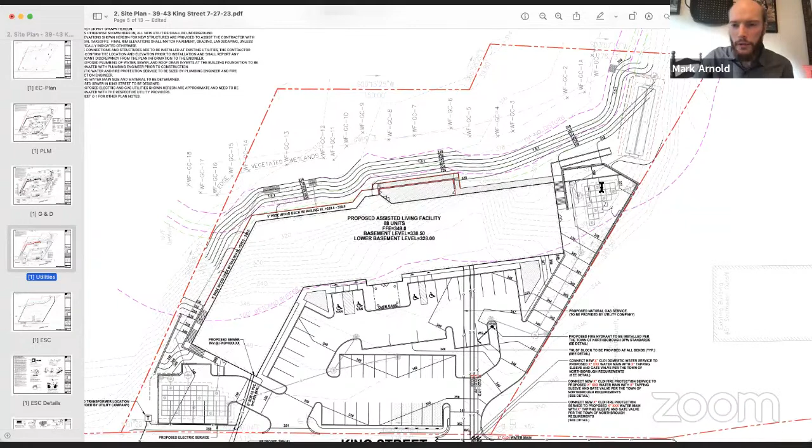Existing buildings are to be demolished. Parking lots up front, a stormwater system to the southwest in the corner to the bottom left, another system to the northeast in the upper right corner, and then another system as well also in that upper right corner.

There are also several different points of stormwater discharge behind the building that have riprap, and those are from overflows from the systems and also from the roof drainage itself.

There's a boardwalk and walkway behind the building with associated patio space that is called out as a paver system, but it's mapped as impervious surface under the stormwater management design.

The purpose of this application is the stormwater bylaw, which was implemented by the town of Northborough after this project received an order of conditions. So we filed a land disturbance permit for disturbing more than 1 acre of land.

As part of this application, this project is subject to the NPDES permit and SWPPP, which is noted on the site plans on the erosion control sheet. That, under the regulations, is considered equivalent to the erosion sedimentation control plan described in section 8 of the regulations. So our applicant is intending to prepare a SWPPP.

It includes all the requirements necessary in your regulations. That SWPPP is usually prepared prior to construction to allow the site contractor to provide additional insight and also to ensure that they are fully up to speed on the regulations of your bylaw and the permits.

We do expect several conditions from this commission. There were several comments by Vincent that we understood could be conditioned. One included noting that the construction edge would be more than 50 feet. The other would be ensuring that the O&M was updated to notify that the commission would be submitted annual reports.

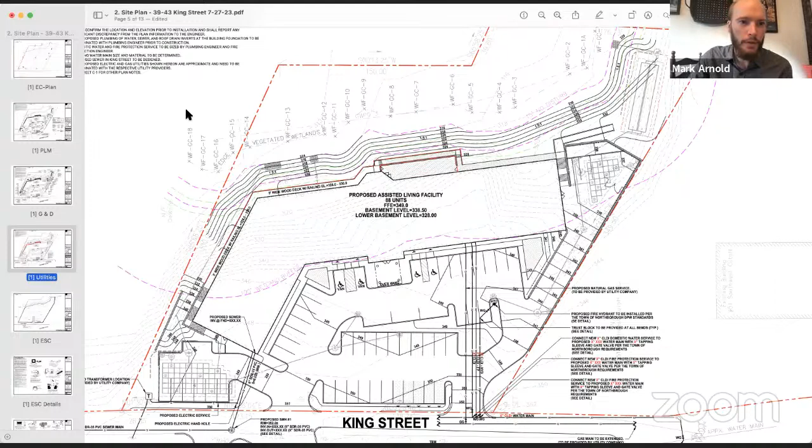There are several others. I don't know if Vincent wants to run through his highlights or I can run through the rest of his comments, but in a gist, that's really where we are. Again, the project is basically the same as it was when this commission approved an order of conditions.

We've added additional stormwater management. The limit of work has virtually not changed. We've actually reduced some grading in some spots, but otherwise it's virtually the same as what was seen under the order of conditions besides those tweaks. Great, thank you, Mark. Vinny, have you received all the information you've been looking for?

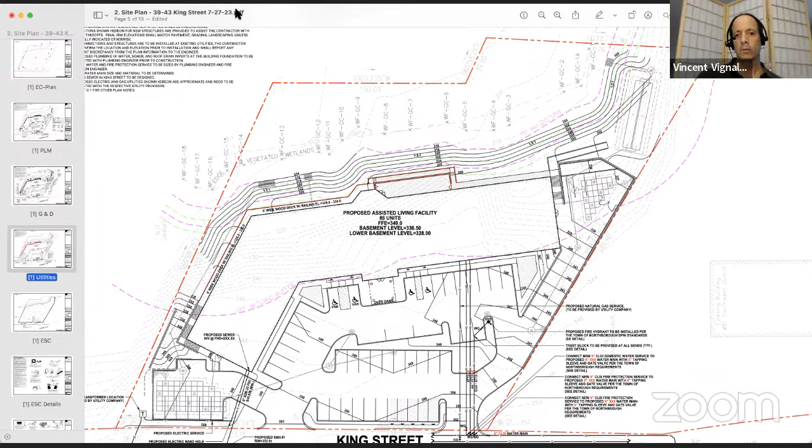Not that I requested. I think the idea here is that this did receive an order of conditions, and it was extended by the commission. But this is a new bylaw, the land disturbance bylaw, so that really reflects the need for the details that are going to occur during the construction activities.

So that is in the bylaw, that those are supposed to be submitted as part of the application for the permit. It also notes in the bylaw that the stormwater pollution prevention plan is considered part of this, and it is typically submitted 14 days prior to the start of construction. They're two separate things - one's a federal permit, the other is a local Northborough permit.

And so that's why I was looking for the information that would be typically included in a SWPPP to also be included with this at this time, so that we would have a chance to comment and make sure that everything that should be in the SWPPP is contained in that document.

And Vincent, we are glad to provide that information in that SWPPP prior to construction. And if there needs to be a condition about a certain deadline to submit that SWPPP prior to construction, you can review that, that's fine. And if the commission wants to put a condition that SWPPP must be reviewed and approved by Vincent prior to the start of work, that's also suitable, I think, to provide coverage for what the town is seeking to protect here, which is the wetland resource areas, and also prevent damage to abutters.

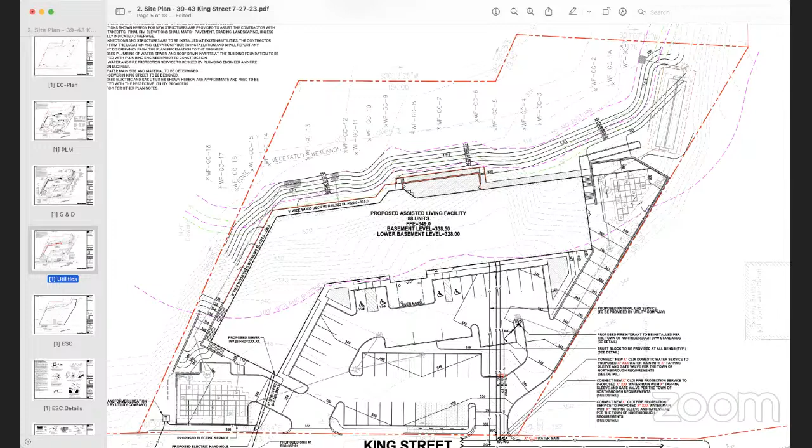Okay, great. Thank you, Rashid. Vinny, what's your thoughts here? I'll tell you mine after yours, then we can go around to the commission, see what they say.

Actually, it's pretty much what I had said. The bylaw states the idea that you're allowed to have the SWPPP submitted 14 days - it's required by federal law that it be submitted 14 days in advance of the start of construction. That's a quote from the federal regulation. The intent that I was told from Fred and in this bylaw itself is to have all that information included in this application, because, as I said, this is not a notice of intent.

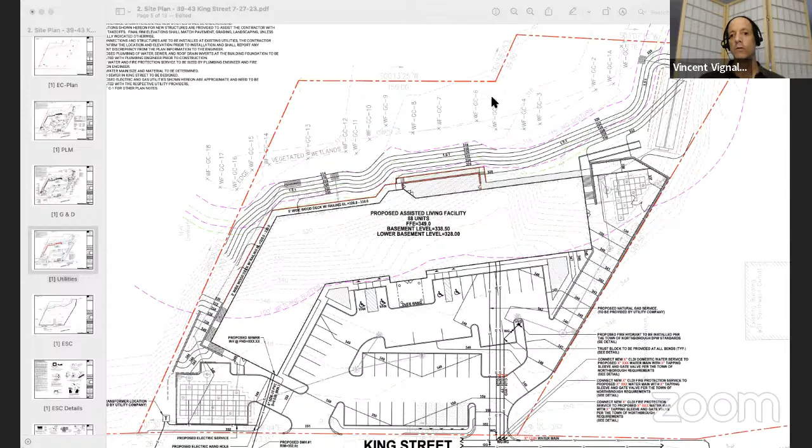One of the questions that I asked was if we could reduce the grading in the upper left corner of the plan.

The response I got was that it's already been permitted. Well, actually it hasn't, because this is a separate permit. It's been approved under the Wetlands Protection Act, but not under this, because changes occurred with this walkway around the back, and the grading associated with that makes the opportunity better for the grading in that back corner to have it as an elevated walkway, as on the right side of the building. They've also added parking and infiltration practices to meet the new revised stormwater standards. So these are things we were going to review as part of the land disturbance permit, and not require them to do an amended order of conditions. So this isn't just a simple case of approving a plan we already have a permit for. There's more to it.

My thoughts here is I'd like to see a complete application, and that includes a SWPPP, and I think we should have a SWPPP done and include that with the filing. This property, we walked it many times several years ago. It's fairly sloped, and there's an active wetland environment right in the rear, and this is going to go right down to the edge of that, as far as it can under the old regulations. This is still a new area we're in, and I really don't want to establish precedent that is loose, let's put it that way. So that's where I'm coming from.

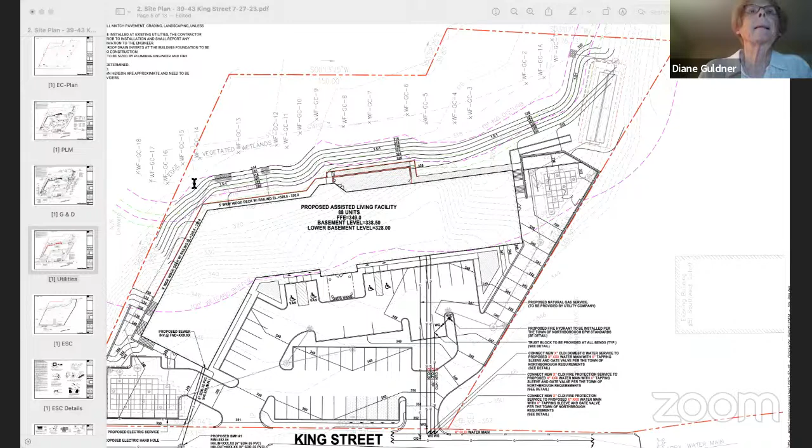No, okay. I see Rashid's hand is up. You're muted, Rashid. Yes, can you hear me, Mr. Chair? Yes, sir.

I don't know how long the SWPPP is good till, but my thought was to do the SWPPP, as it's required by law, 14 days before we're ready to start. Honestly, I have not chosen any operator on this yet, so I would rather just do what Vince is saying, provide the information, the portion of the SWPPP, whatever is needed in this application. I was already planning to do a conference call between my engineer, Mark, and me pretty soon, making sure we're all on the same page and work collaboratively to provide whatever you need and get the job done.

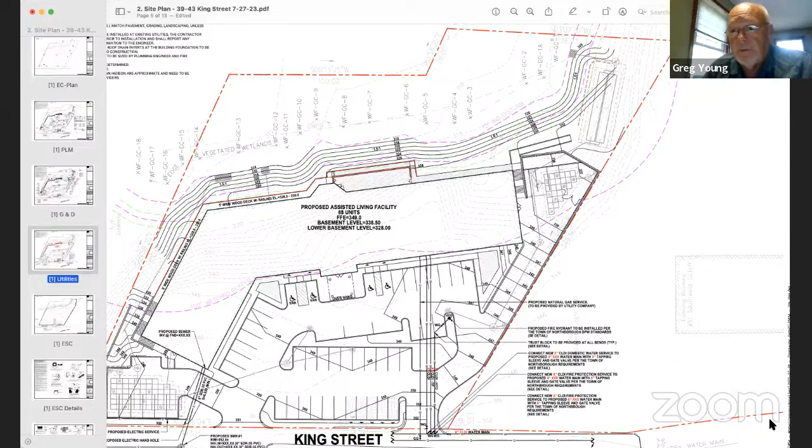I see. Board chair, Vince, whatever, I'd like to hear if there is anything, if you're not going in the right direction. My two cents says you are going in the right direction. There's some open ends here. You already have an order of conditions issued, so you have that. And Vinny, I think you're just looking for a few more pieces of information. Yes, I think you're over any hurdles. Everything is acceptable. Now we're tweaking it to make it workable and to be sure that the contractor gets a plan that is going to be buildable and have the least chance of any negative impacts to the wetlands and resources. Fair enough.

Okay, so you're saying, Vince, through Mr. Chair, could I ask a question to Vince, Mr. Chair? Sure, but we want to keep it fairly short so we can vote this continuation and move on. But go ahead, Rashid.

Okay, so I'll just ask everyone, other than the comments you have made, Vince, in writing in your response, we'll review one more time. We'll make sure if we have questions, we'll do a conference call. There's nothing else we're talking about. And also, we're not really saying we necessarily have to do the SWPPP now, as long as we provide you the information you're looking for.

Yes, you don't have to do a complete SWPPP form, but the information that's required by the town bylaw is generally the same information that gets included. It's not all the details of the SWPPP, but it's the meat, it's the real issues that are presented in there.

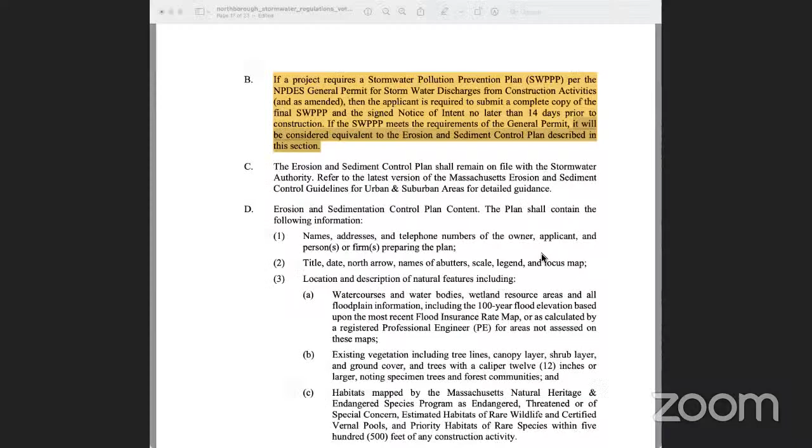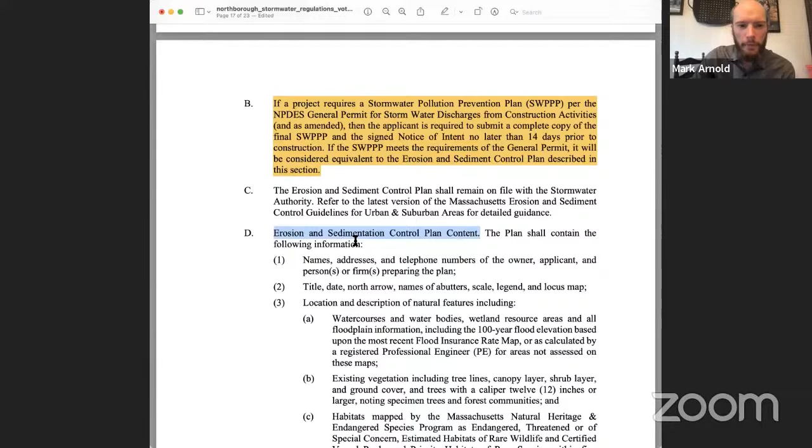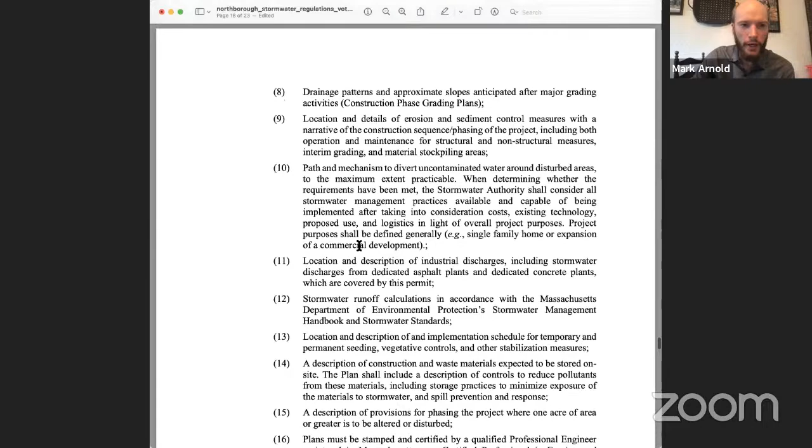Sure. Mark, you have any question? I guess I do, Vincent, just because again, there's the erosion control plan content, which is in your bylaw regulations, which is on the screen right now, has a lot of information. It wants maps and soil information, topography. We have the site plans already, and we could add information to that. But before that section, this is where Vincent, Rashid's asking that question about the SWPPP. The regulations do say if the SWPPP meets the requirements of the general permit, it would be considered equivalent. So that's where, again, we're glad to add the notes that you asked for. Easy, we could do that.

I just want to make sure that the SWPPP is a big effort to the commission, to the chair here. It's a big effort for us to put that all together. It's a living document, correct, but the big effort is up front, and then after that it gets tweaked.

So that's why Rashid's just kind of asking that clarifying question. I think we can provide, Vincent, all your answers we can address directly. We can put all those notes that you asked for on the plan. I think that can happen very easily. And we can follow up with you to make sure any other notes you can add there, and we can look through these below comments as well.

But I think the regulations were saying, well, if the SWPPP's going to have that information, do we need it in two different places? Do we need a separate plan as well as the SWPPP? So again, from Rashid's question to Vincent, I don't think a full SWPPP is required, just better information as you requested in writing.

Right, and that's why I did not request the SWPPP. You're the one that responded and said you would provide a SWPPP at a later date. What this thing says is if you have a SWPPP prepared, that could comply with all these different additional regulations under the land disturbance permit. So if you have a SWPPP already done, you may not need to do all the other little things included in here. But if you haven't got a SWPPP done, what we're looking for is all the other stipulations, and that gets reviewed as part of the land disturbance application.

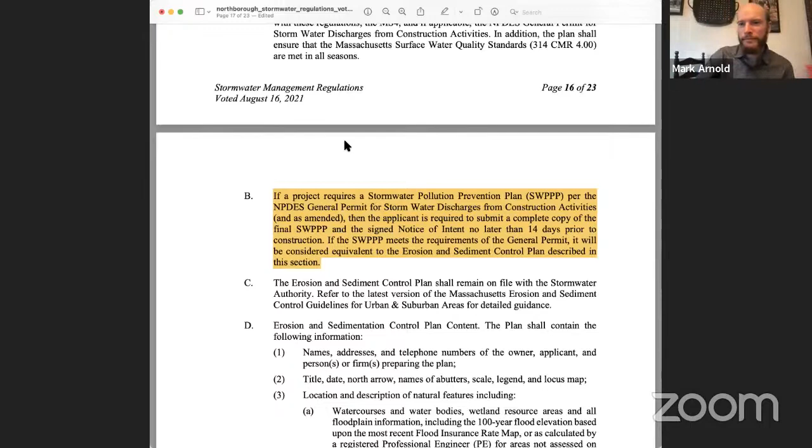Okay, so looks like we're going to continue this to September. Hopefully we can close it up then. I think we probably can, with we're close enough, Vinny, right?

You're muted. Get off that mute button. Yeah, sorry. Yes, I think so.

Okay, so we're going to vote to continue this to the September meeting. We need a motion. So move. Is there a second? Second by Justin. Roll call.

Dan Clark, yes. Justin Dufresne, yes. Diane Goldner, yes. And I vote yes. Todd is abstaining.

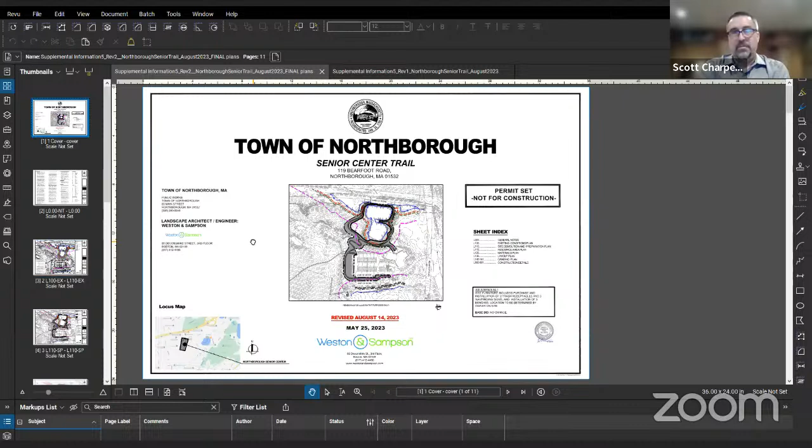Josh, can you walk us through some of those? Mr. Chairman, Josh will be happy to go through this. We did have to amend the alignment of the walkways to accommodate some budgetary constraints through what we've gone through before the commission. We've added all the slope arrows as requested on the walkway adjacent to the resource, and the slope mat limits are clearly defined on the drawings. I'm happy to give it over to Josh to go through what other changes have been incorporated.

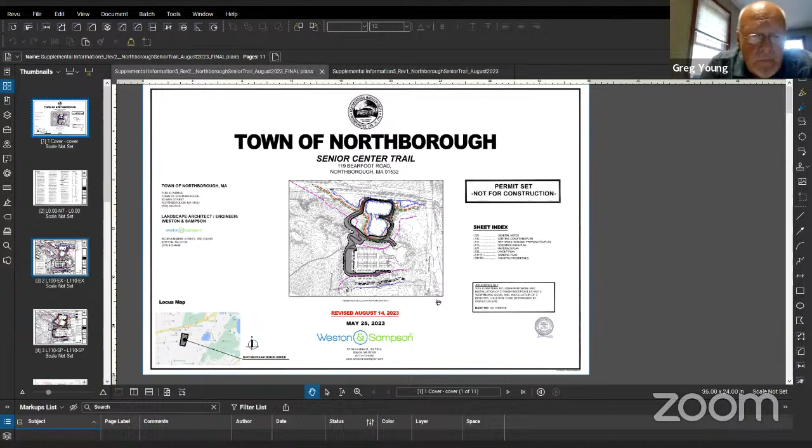Super, super. Thanks, Scott. Can you guys see my screen? Yes, I can. Yep, okay, so this is just the first page. Brandon, do you want me to run through it, or do you want to run through it? Yeah, why don't you go take the lead, Josh, and then I'll chime in as appropriate if needed. Great, thanks, guys, so I'll just dive in.

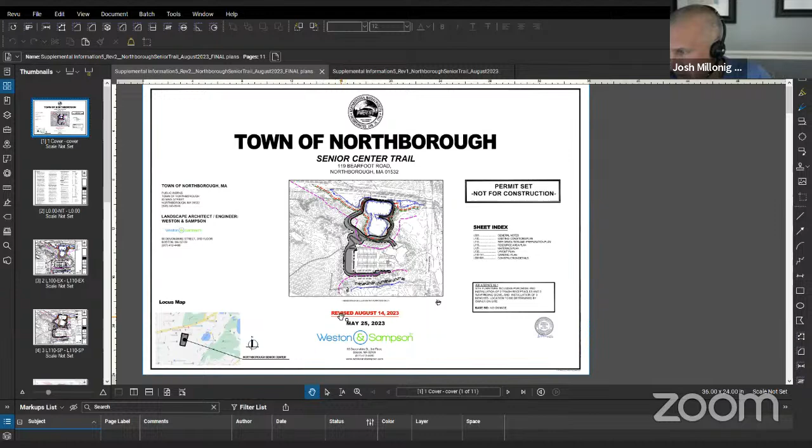So here's the front page. We revised this early today. I sent Vinny some updated plans over the weekend, but we'll just get into the meat of it. Let me zoom in real quick here. So here is the site prep and erosion control plan.

As Scott and Vinny mentioned, we used to have a large jug handle loop that went off to the right through here. If you guys can remember, we've eliminated that. Also, previously we had a steeper walkway that hugged closer to the wetlands there. I believe this was a comment from one of the commissioners last month, that if we could relocate that, it would be advantageous to the commission and to the environment.

So we took those two comments under consideration. We eliminated the larger stone dust jug handle that's on the left here, as I just highlighted, and we also pulled the accessible path further away from the resource areas. It's now all accessible, all 4.5%. So the entire loop path is paved, it's all ADA compliant, a complete accessible walkway. You don't get to a certain area and need to turn around — you can circumnavigate the entire wetland all in one shot.

But then the rest of the area pretty much stays the same. We have some stone dust walkways up off of the parking lot here. And we added some additional low-ish points — myself and Vinny, or Weston and Sampson and Vinny, walked through here just to really help with erosion and to prevent water from potentially spilling down the steeper areas of the slope.

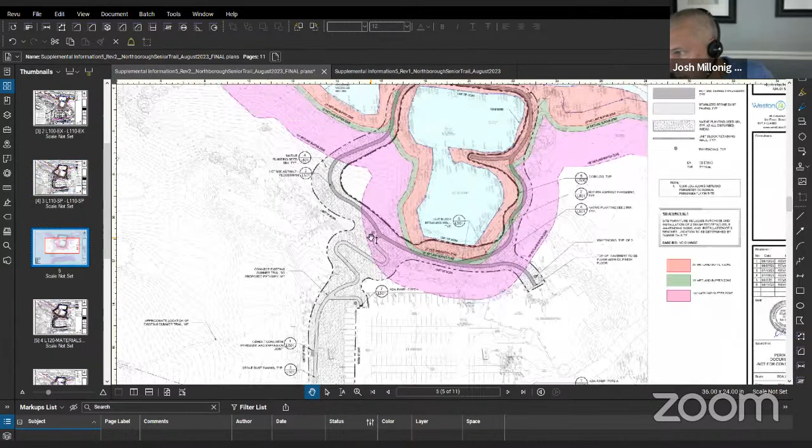Here's the updated impact plans here. So you can see everything in the magenta purple area — that's your 100-foot wetland buffer. Your red is your 0 to 25, no disturb. And then the little green area is between your 25 and your 35.

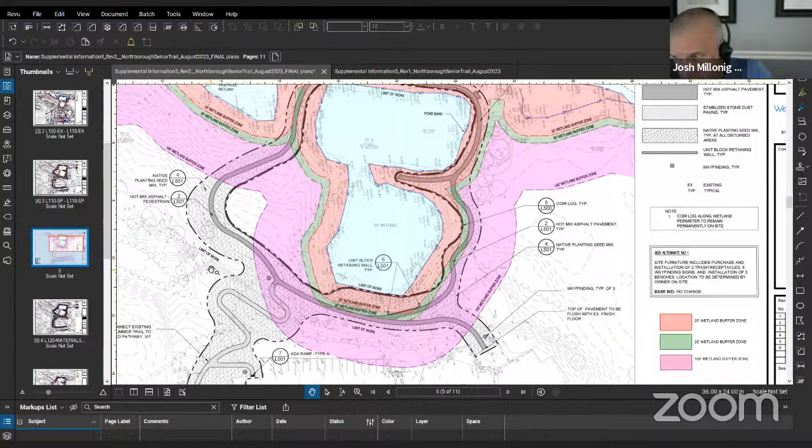As you can see, I don't know if you guys can remember, but we had a lot of walkway skipping around the red and green area here, but we were able to pull that out into the forests and grade it out so it's accessible. So down the lower left corner, we have updated impact square footages and numbers.

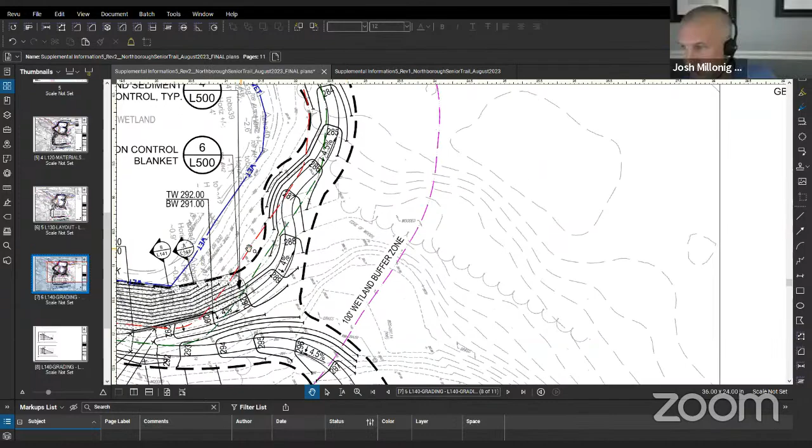Let me just switch over quick to our grading plan. Don't mean to make you guys dizzy, but I'll show one of the areas that was one of Vinny's concerns — we do have a little retaining wall, you guys can remember right through here, and a steep slope from the grading to get down to the wetland areas. So we've added some slope indicators, so any water that comes down the hill or lands on the walkway is going to get directed towards the uphill side of the pathway.

So basically the water is being directed away from the wetlands. And then we added a couple little lower areas to allow some additional infiltration. And then as water makes its way down the right-hand side of this path during a storm event...

In this particular area, which was fairly steep, this was one of the areas where we hatched out. In our detail, every slope steeper than 4:1 is going to get a jute mat stapled down to the ground. This particular area here, we do call out for 2 additional straw wattles to be installed along the slope in this hatched out area.

Let me highlight it for you. Just where it's really steep. So we're calling for additional, on top of the jute mesh matting, 2 additional straw wattles that we can install and move around based on current conditions.

But then also along the bottom, we have the 12-inch coir tube that will be planted with a wetland appropriate seed mix, but then also just upstream of that, kind of belts and suspenders, we do have a silt fence and a wattle in front of that.

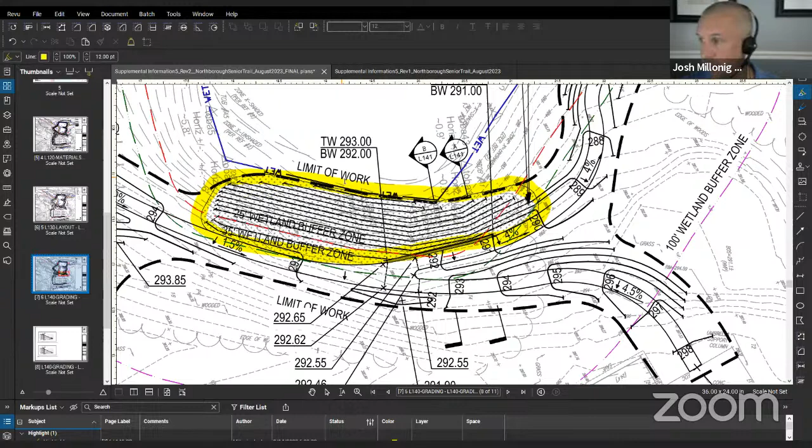So those are the highlights, the quick hits. So yes, we took some of the commission's comments and incorporated them, just in regards to operation and maintenance, as Scott has noted, as well as Vinny.

We've added a bunch of notes throughout the plan set to provide, essentially, the owner's representative or engineer of record, whoever ultimately is going to be signing off on behalf of the town, the flexibility to direct the contractor during construction to either add or adjust additional erosion controls.

Just to ensure that, in real life, as Josh was noting, we are anticipating in order to preserve as many trees as possible. We have a pretty good sense of the ones that we know have to come down. But as you folks are aware, getting out in the real world, you have a dot on the map that says this is a tree, that's not the true diameter of the tree.

So we anticipate minor adjustments to the path, things are going to shift out in the field, and we're going to GPS locate everything and be able to make those adjustments on the fly. But because of that, we want to ensure that the contractor has the flexibility to make adjustments, and that we have the flexibility to direct the contractor to make those adjustments.

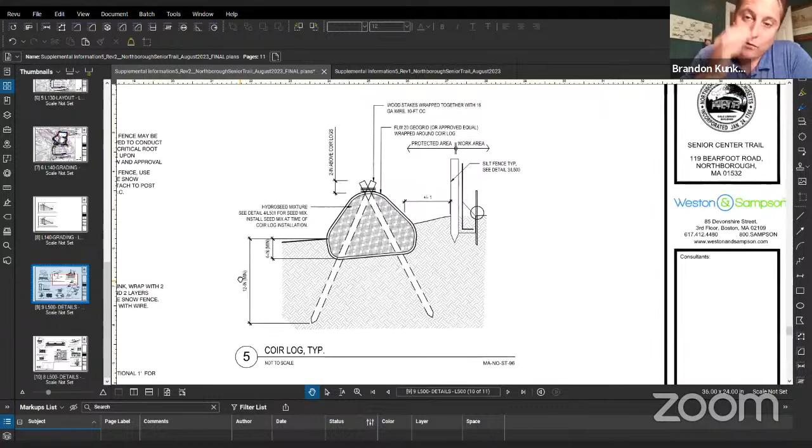So really, it's a belt and suspenders method to ensure that throughout construction, and then ultimately till establishment of the vegetation, to the satisfaction of Vinny and us and the town, these erosion controls are in place, so that we aren't risking any sediment or pollutants finding its way into the wetland area. That's really what Vinny has been great at, working through with us and providing insight from the commission as well as the town.

So we're hoping that everyone is feeling good about this, and we're able to close the hearing tonight with fair enough. Brandon, two quick questions I have.

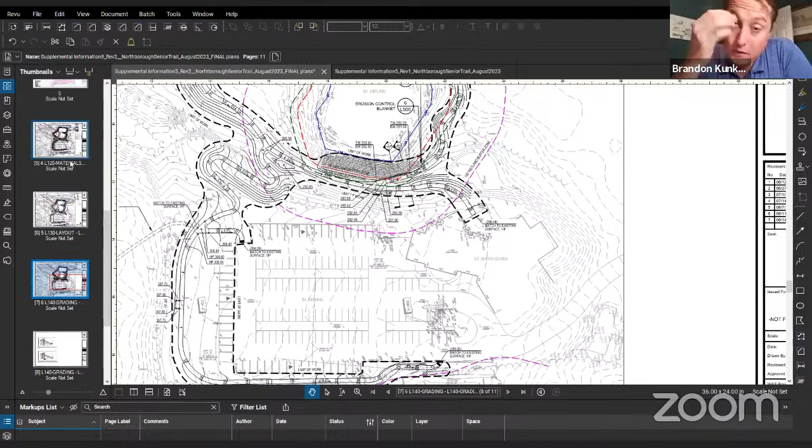This is maybe just reminding me about it - the back end walkway, on the side nearest to Iron Mountain, that's asphalt, right? That's tar. Is it everything stone dust? Yeah, everything is asphalt around the immediate wetland area.

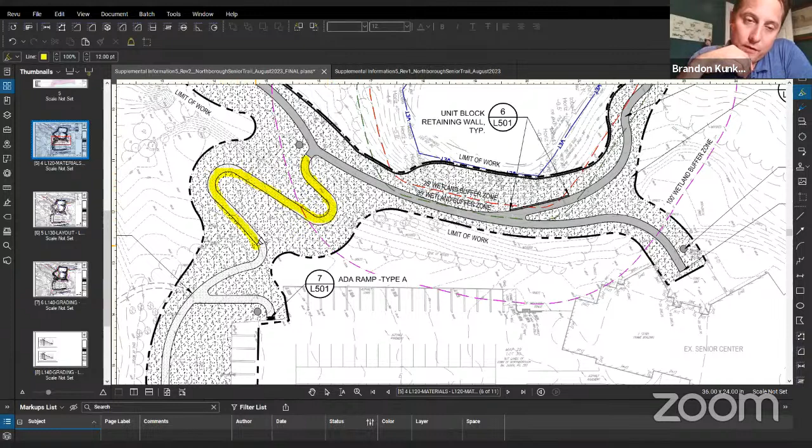As we get closer to the parking lot where we are further away from risk of erosion and the slopes are a little bit more forgiving, we felt it was appropriate and acceptable to transition to stone dust. Okay, that was my second question, so we took care of that one first.

That's right. For that piece in back on the north side, is that going to slope away from the pond and towards the Iron Mountain, let's say? He's referring to the area by the railroad. Right, railroad, correct, yeah.

We skinnied that down to a 10-foot wide section. This area is a little bit difficult because you have wetland flags on either side of it, a little isthmus in between. So generally speaking, we would install this fairly flat or with a very slight slope just to sheet flow water off. But it's kind of which way do we want to push the water?

Just to be clear, and sorry to interrupt, Brandon. Yeah, again, this is a paved walkway through a wooded area. There are no vehicles, there's no salt, there's no sand. This is not a walkway that people will be salting in the wintertime. It's not access to a parking lot at a mini mall or something. There will be no vehicles out here. So during construction, there are significant protections proposed in front of the commission. From a long-term operations perspective, there may be a junior operator walking through there with a backpack blower occasionally to remove leaves, but that's the extent of operations and maintenance back here.

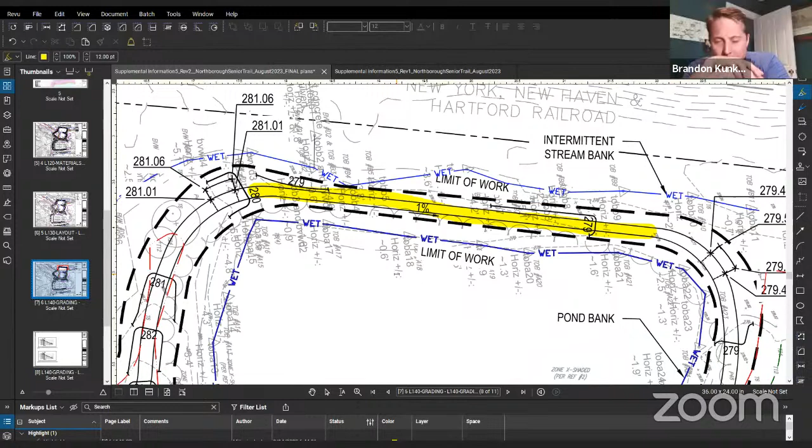Good, other commissioners have questions? Comments? No questions. I comment, I just want to say I appreciate that you took our comments and reworked this. I think it's a big improvement and really provides a lot of additional protection to the resource. So I appreciate it, I think it looks great. Yeah, I agree, I was going to say similar to Dan, appreciate you guys working with us. And I think it looks really good.

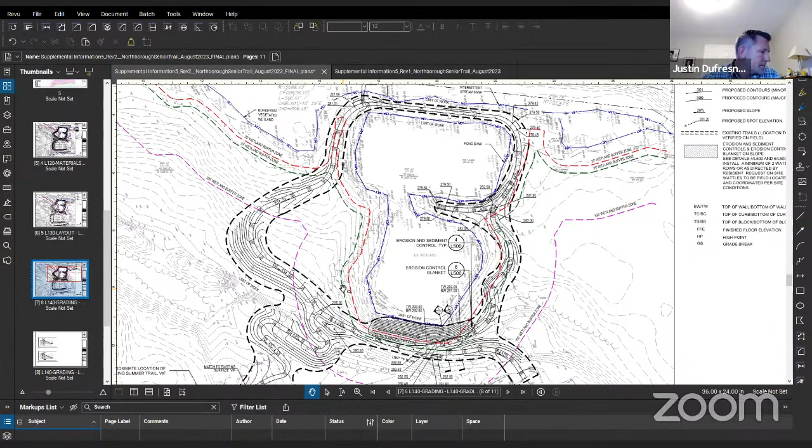Super, great to hear. Let's see if we have any public comments. I don't see any.

Okay, Vinny, if you're good, we can move forward, I think, yes? I'm good. I've got some details to look at, and there's a bond requirement in the bylaw, but because it is a town-owned property, we're gonna have a condition probably to require that the bond that is generally required for this kind of a project, the last, I forget the number on this site, I think it was a $10,000 bond amount that was needed for restoration, that they don't release the last 10,000 until it's approved by the conservation agent and the town engineer. Oh, there's no town engineer, so just the conservation commission.

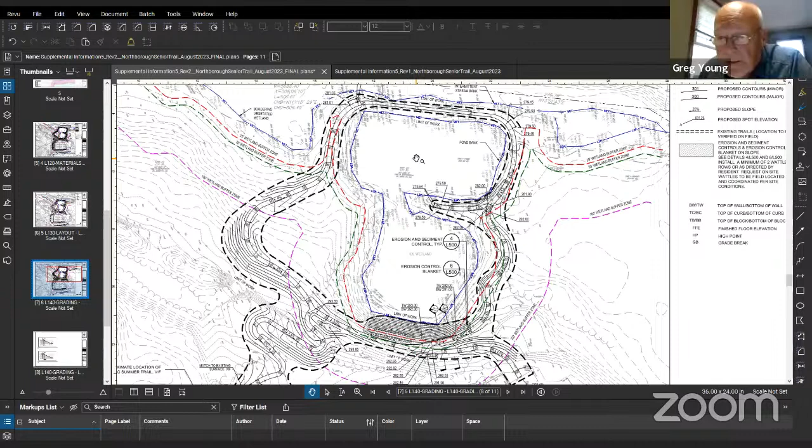Fair enough. Do we need a motion to close the hearing? So moved. Is there a second? Second by Dan Clark. Roll call: Dan Clark, yes. Justin Dufresne, yes. Diane Goldner, yes. Todd Helwig, yes.

And I vote yes. Now we're looking to issue two things: a notice of intent and a stormwater management and land disturbance permit for 119 Barefoot Road. An order of conditions, yep.

So moved. Is there a second? Second, seconded by Justin, I believe. Roll call: Dan Clark, yes. Justin Dufresne, yes. Diane Goldner, yes. Todd Helwig, yes, I vote yes. And that's including our standard conditions, and we're not going to include anything about fencing or signage along the wetland area, right?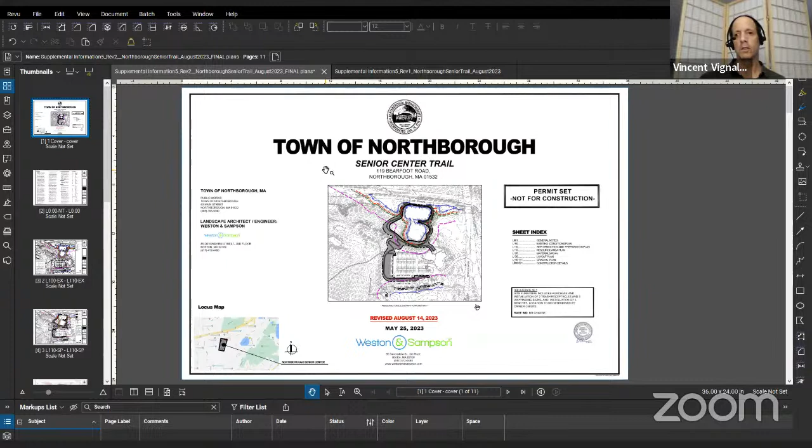I don't think we need to. Nope, it's town property, so. Yep, all right.

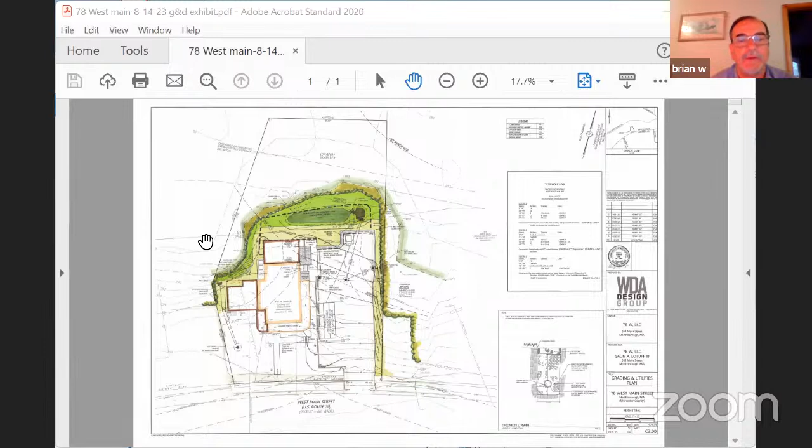Do you want me to put a plan up here? Sure, if you have that — which color one? The one I sent today, was that the G&D exhibit? Yeah. It's coming. Yeah. All right. Okay, there it is. Yeah, there you go. I'll zoom in — can you zoom in just a bit, Vincent, please? I will, I know it's a little slow and clunky. There it is.

So you can see on the left-hand side of the parking lot there, that's the second deep sump, over to your right, Vincent — we added that catch basin there. And the stone strip just north of that, Vincent, we turned into a French drain, and actually have a pipe discharging to the riprap before the forebay. So just a little more capture and treatment there, and whatever water goes through there would go through the riprap and into the forebay. Instead of just being a stone strip, we added a French drain and discharged it to the riprap.

We also — it's not on this plan, Vincent, but it's in the plan set you requested — extended the construction entrance 50 feet. That's on the erosion sediment control plan, so that comes in about where your hand is. That stormwater infiltrator you see to your left, that was rotated — it was at like 49 or 40 feet from the wetland, so we rotated it to officially get it more than 50 feet from the wetland.

We updated — you had some comments on string trimming around the fence, as part of the long-term maintenance and operation around the vinyl fence there that runs by the restoration area. So we updated that to, I think you had requested, up to 2 feet. We also updated a few things in the O&M plan language and in the stormwater pollution prevention plan, and that was revised and sent to you as well. Let's see, trying to remember what else we had.

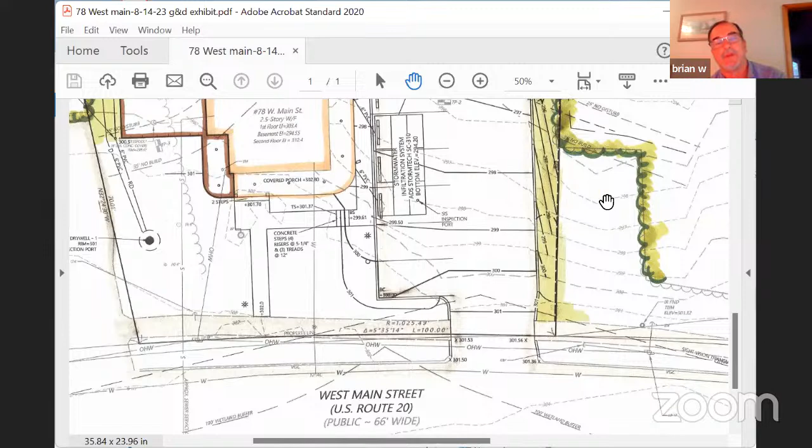Oh, I know one other thing on the right-hand side, Vincent, you had asked for some hay bale check dams. They're called out on the erosion plan, you can see the horseshoes there, two or three of them, so we didn't get channelizing along that erosion control barrier. That was one other thing you had asked for. You can see a horseshoe there, more clear on the erosion sediment control plan. I didn't send every plan colorized, running out the door for another appointment this afternoon, but you have everything in the full plan set. I think we addressed all the comments.

And so we also had some flood storage. The 100-year floodplain was filled in this area here, and right above it you see it's compensated. The flood fill is 22 cubic yards there, and it's been compensated over in the flood comp area on the left-hand side.

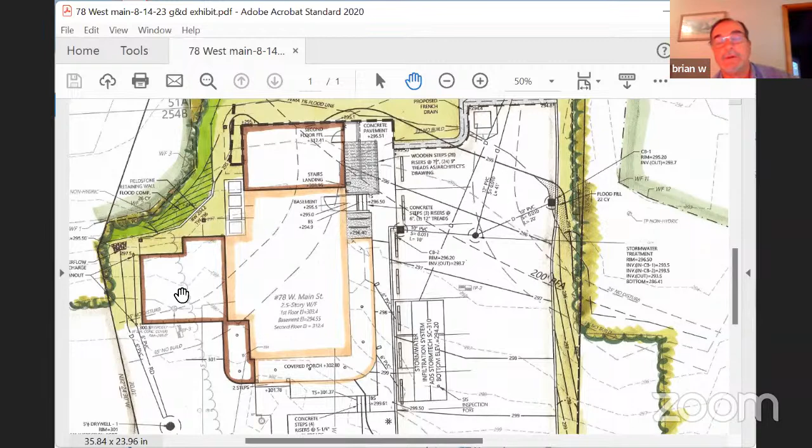And that riprap outfall to the left there, we pulled that back farther and made it smaller so it's farther back on the slope and not into the restoration area. That's overflow, not the design, just in case that dry well ever overflows, which I would highly doubt. But we have good soil underneath there, it's very deep - I think they were down to 11 feet and didn't have groundwater, and had good A soils. I believe Barry said that's a 5-foot diameter dry well, so it will handle a lot of water. So the entire existing roof plus the new roof is all being infiltrated, where right now you just have downspouts or sheet flow off the roof or gutters. So everything's going to be recharged.

Good. So Vinny, I think we've addressed all the comments, and if there are other questions that you have now.

Brian, have you addressed all the DEP comments? We replied, Vincent, yeah, we replied to that today. We had received the comments July 5th, which was a Wednesday or Thursday, and the first meeting with you guys was on the 10th, so we had not replied yet. We spoke to Kim on the phone to go over that, and that's what I discussed with you on the 10th, the comment about not being in rain garden.

Some of our comments were, well, you don't have separation on your rain garden to groundwater, you've got to do a groundwater analysis. But the comment before that was, well, you can't have a rain garden. So when we took the rain garden away, the infiltration, that went away. She had asked that if we didn't have 4-foot separation to groundwater on the middle infiltration system there, that we do a groundwater mounding analysis. That was performed and we sent that along to her and to Vincent today. They ran two methods, the Hantush method and the GroundSolve program. I believe the GroundSolve we sent today, and that was also copied to Kim Roth at DEP.

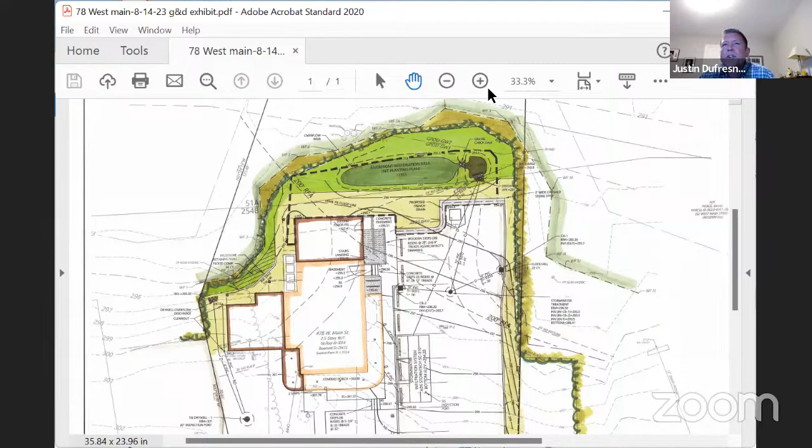I think it shows like a 293.2 elevation on the invert. Just be careful there. I see like a 294 contour, and if that's a 12-inch pipe, it's going to be sticking out of the ground.

I'll double check that, Justin. 292 - I think, is that a 6 or 8 inch? Can you scan it? It's a 12-inch. So you're probably, and it has a really shallow slope. That is a 12 inch.

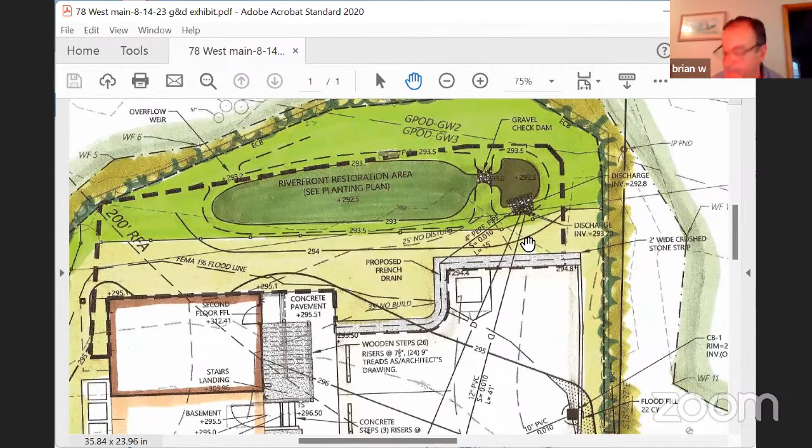Yeah, so you might be a little bit exposed there with the top of the pipe. So you might just want to show like a little bit of fill or something over the top of it, but it's very minor, just wanted to make sure. And double check your elevations, usually if you do that French drain thing, if it has a pipe in it and these pipes are running through it, just double check a couple of those crossings.

But I think overall, just a big improvement for the site. I think it's going to be great. Super, good, thanks Justin.

It would be okay to pull that head wall back if they need to, if they don't have enough cover, pull the head wall back a bit. It gives a little bit more stone there as well. Maybe pull that back and increase the forebay size a little bit to take care of it.

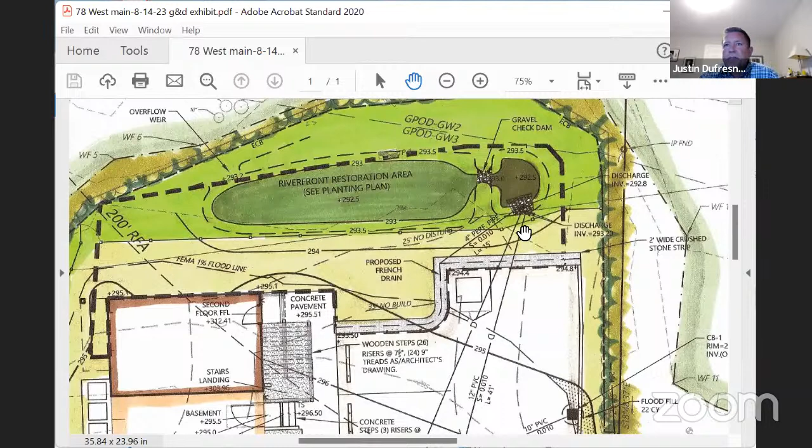We could do that as a field sketch and just send you a plan change for 8.5 by 11 or 11 by 17 if you want. Yeah, that's changing the head wall by 5 feet, that we can do in the field.

Super, I'm sure there'll be a couple other little things like that too. Yeah, when you get started on construction, as you know, from the discussion you just had on your SWPPP for the last project, things crop up and you make adjustments and fight the good fight to try to keep everything in shape. So, do what you can.

Anybody else have questions, comments, concerns? Okay, double check, see if we have any public hands up. No, we do not. Okay Vinny, so if you're good and we're good, we can move ahead with this one, I believe.

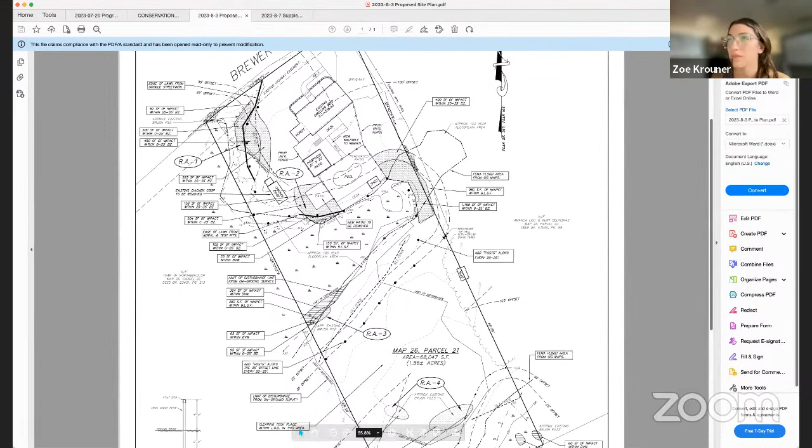And so I can pull up the revised plan if you'd like. Sure, please. All right, can everyone see the site plan? I can, yes. Okay, perfect.

So there's a lot on here. A lot of the square footages of impacts, current ones or temporary ones, were all added to the site plan per Vincent's comments. Most importantly, the patio is proposed to be removed and relocated in the 100-foot buffer zone right here, with some fencing for safety around the pool, extending out to the house. All the restoration areas stay the same.

We have restoration area 1, where there were trees removed that we plan to restore. Restoration area 2, where we propose to remove the patio, get the fill out of the wetland where it trickled down off the slope, and fix that up — it mostly was lawn. Then get the brush piles out, brush pile in restoration area 3, and restore that with plantings and seeding. Same with 4 and 5.

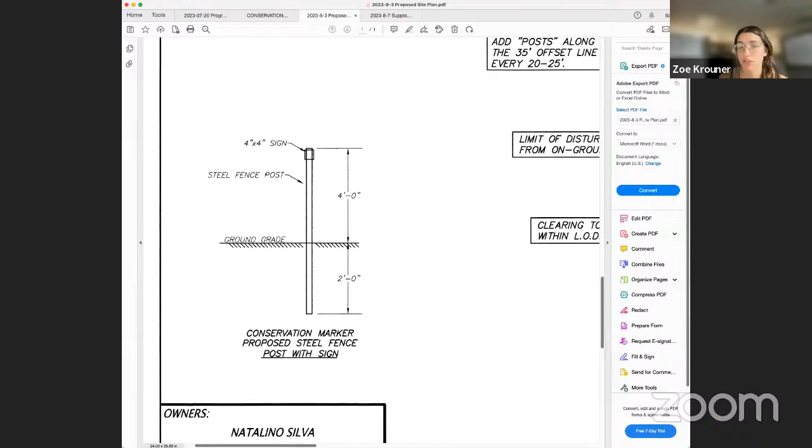And my apologies for forgetting to even mention those, though they're clearly on the plan. So yeah, we're going for metal posts with signs, and there is a detail on the plan. So let me first address that - the detail on the plan does show the steel fence post with the sign. I was reading through the installation guidelines on the wetland area sign, and unless I'm missing something, the requirement was for the post to extend below the ground surface at least 36 inches. This one only goes down 2 feet.

If that's really important, that it goes down a little bit deeper, that's an easy change we can make. As far as their location, we did it in a way where the applicant, so we did it along the limit of lawn.

Especially in this area, it's mostly lawn with a few really nice big trees. So to allow the applicant and the homeowner to maintain it the way he has for a while, to put them out into the middle of a lawn, we didn't really see a benefit of that. Whereas at that limit of forest edge, it's actually protecting the wetland resources. We felt like that was a good location for it.

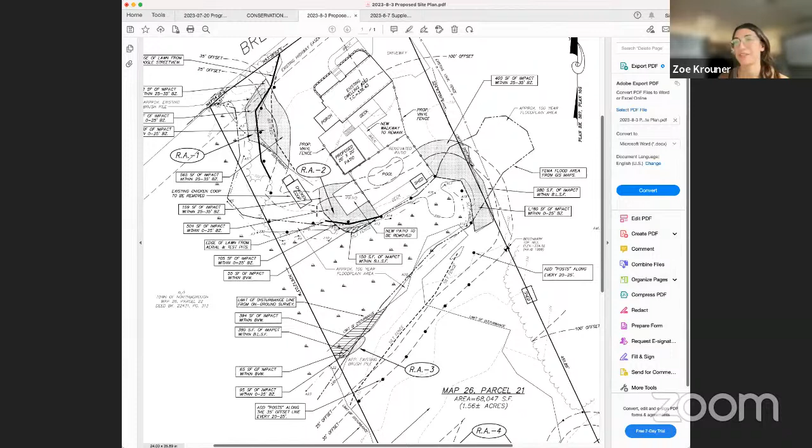To have the signs on them every 20-25 feet, I feel that's sufficient to prevent future encroachment. I know the homeowner clearly has learned a lot about wetlands since this whole process, and any homeowner that takes the house in the future will have this very well thought out, detailed plan to show those posts that will be out there.

Okay, so the post idea is that the post is beefier. Your detail doesn't provide the size, but we'd be looking for something to be specific about that. And the depth is another thing, but the size, what did your sign that's 4 inches by 4 inches say?

Let's see, I think we left it - I don't think we specified. I'd have to check my responses. I don't know if we specified what the sign would say, but we're more than happy to have it say whatever the commission feels is right. I think maybe throw that in as a special condition for the sign.

So what is the sign requirement, the size that I'm missing? I think it's a 12 by 18 inch sign, and it says wetlands, wetland area, do not disturb, or something like that, which is difficult to fit in that small of a size. If that's our biggest problem, that's not a big deal, but that is one of the issues I had.

If we go back up to where your signs are located, the idea of it's an existing lawn - in reality, that's an area that a guy went out there with, I'm not sure, a Kubota or some kind of small machine and pushed material out and in towards the wetland that's going to get removed. So I'm not exactly sure how much of a lawn it was, but the idea of protecting just the wetlands with the signs would be appropriate if it were just under the Wetlands Protection Act, but Northborough has a 0 to 25 foot no disturb zone.

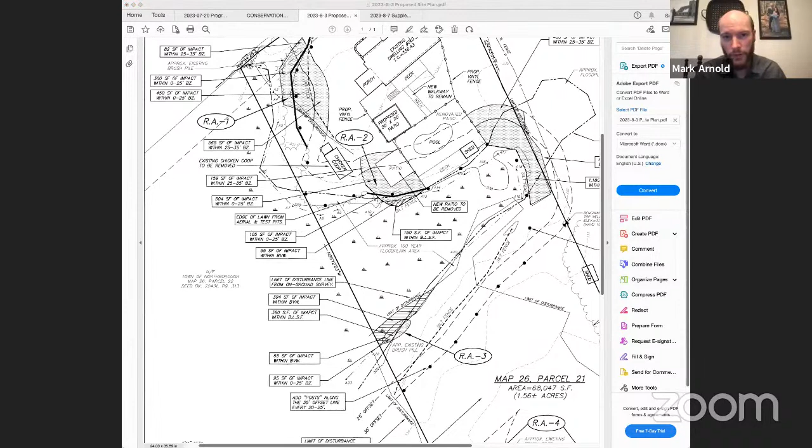So that's the purpose of the markers where we put them. We tried to be thoughtful about them, and that's why you see them pulling out in certain areas. I think we were conservative in some spots, but we wanted to be where the family uses that area. The trees in that 25-foot behind the chicken coop are a beautiful recreational area where you get shade in the summertime. I don't think the commission has ever asked that it just be taken away every time there's an application, just because it's already lawn.

So I want to ask the commission that question again about these existing lawn areas. I don't think, Vincent, that you're saying any of these markers are pushing the lawn out—I think we're right along the edge. But the commission may need to voice their opinion about taking this lawn away and putting these markers in areas that have been existing lawn.

If it were an existing lawn, I would agree with that. If you want to stop sharing, I'll show you a picture I took when I was out there of that area by the chicken coop—that's why I didn't consider it a lawn.

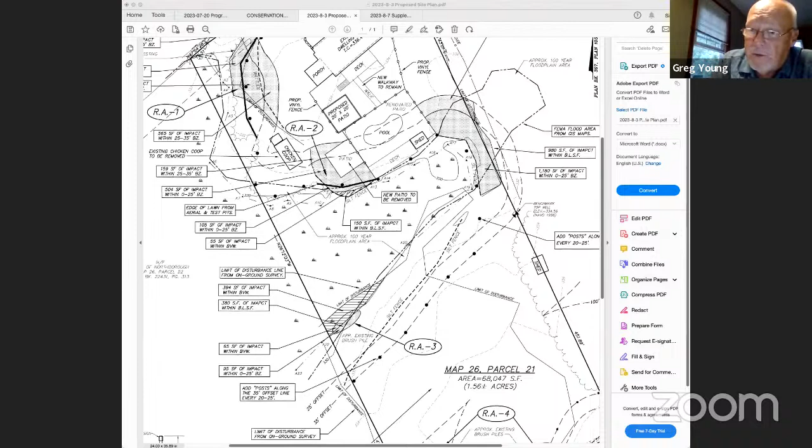And finally, I would vote that we could maybe make some exceptions on the 25 from certain areas, but not all—I'm flexible on some of the locations. I understand a sign being in the middle of a lawn is gonna get knocked down by kids eventually. So those are my 3 comments: size of signs, the number of signs, and location.

Down the road on Maynard, there are two houses just as you turn the corner on the right-hand side. The second house down has a little sign, probably not even 8 inches by 8 inches, down at the edge of a slope. Unless you know it's there, you don't see it. I would think something like that would be more amenable, and they could space them out.

Or, you know, in that respect. But you don't need that many, because there's just the one little sign there.

Whatever the commission wants for signs and spacing, I think that's absolutely amenable to the applicant. If the commission wants fewer signs than what's on the plan, we could do that as a field call by Vincent to lay it out and actually put them in. That field call might be better than what's on the plan here, because it makes it easier.

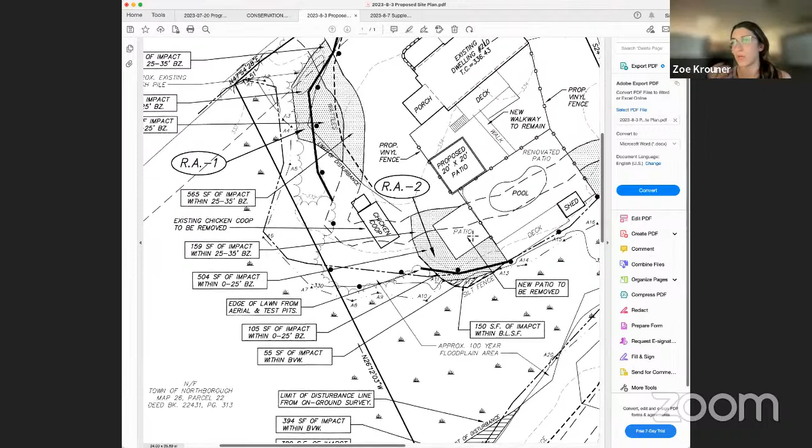As far as the impacts, I don't think those numbers were included in these where the arrows are pointed, but we know that the patio is 400 square feet and we know that it's there. So the plan is to restore it back to lawn.

Okay, so it's just going to be lawn? You're not going to have trees or shrubs planted to reduce getting in closer to the wetland? The idea I'm looking for, when you said the fill kind of dribbled down from the construction area, actually that was dozed into or pushed in with a machine to the wetland. So I just don't want that to happen again with another area.

There was an existing order of conditions on this property from many years ago that said the only alteration in that backyard was going to be within 15 feet of the pool. So there was a prior order of conditions on this, and we ended up with this situation occurring. I don't want that same situation to occur again.

And then as you go farther in, to the east end of the wetland, to the right of the pool shed area, you can see that line that loops off into the neighbor's property. That is the 100-year floodplain that's mapped. What I'm looking for is to see how much floodplain has been filled so that we can do some compensatory volumes if we have to.

But there is no elevation on it. So I was looking for an elevation for that so that we can figure out how much was filled, and possibly there was some filling done at the end of the property on the east end. Did you do soil tests to see that there was no filling occurred there?

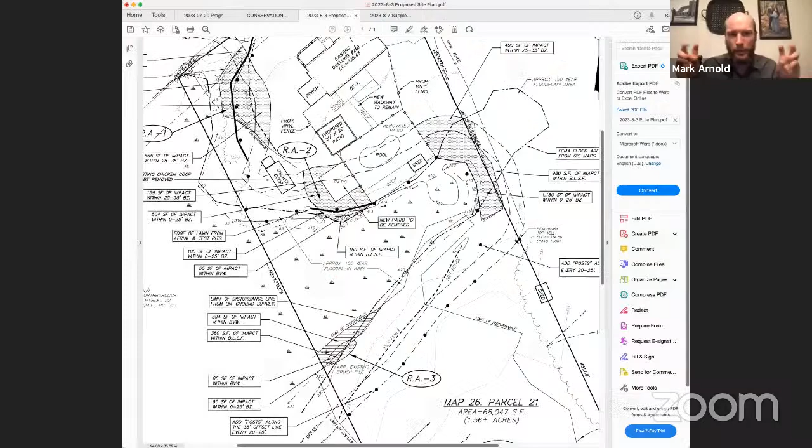I think, where is that? Yeah, there's a fence now along that tree line. The trees, I don't think are there, and there's a fence now. So, but this just gives you an idea that there was lawn access around this wetland to the back. And it probably got shifted over time because there were trees, so people thought it was the property line, and then they put the fence up, and then the line moved because now they know where the property line is. Okay, if I could share the photo that I have.

I mean, the reason I thought it was fill, I can show you the photo and when I was out there. So you need to stop sharing, Zoe. Oh, sorry. There we go. Thank you.

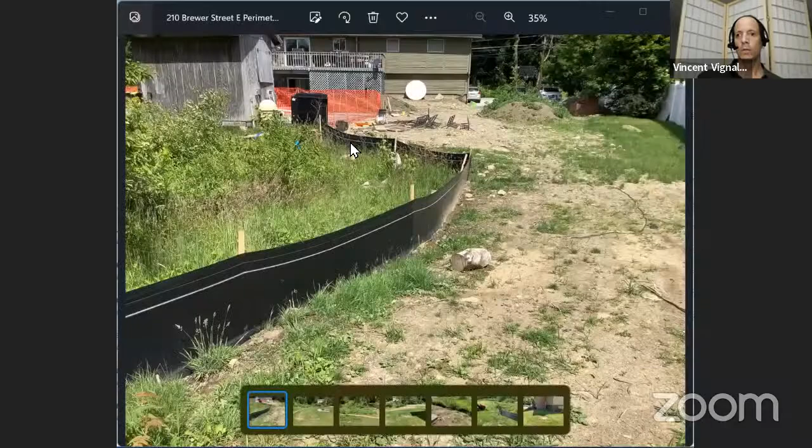So this is the area that I saw. The pool house is there. This is the area that we're talking about. Wetland edge is right there. Fill was there, the fill removal. So this to me looked like it was fill. I mean, it doesn't look like a lawn to me with the rocks and all the other stuff there. Your picture, I'm not sure how long ago that was, but that was why I was considering it being a fill area.

I mean, if you run equipment over a lawn enough, you can rough it down to the subsoil. And this was in your highly manicured lawn area, so I don't think the rocks are an indication of that there. Again, we looked at it, and I don't think out there we have anything that's significant of any measurable depth. I don't think we found anything that looks like fill on the lawn in that area. Okay, like I said, I didn't do any excavation, so this was the basis for my question.

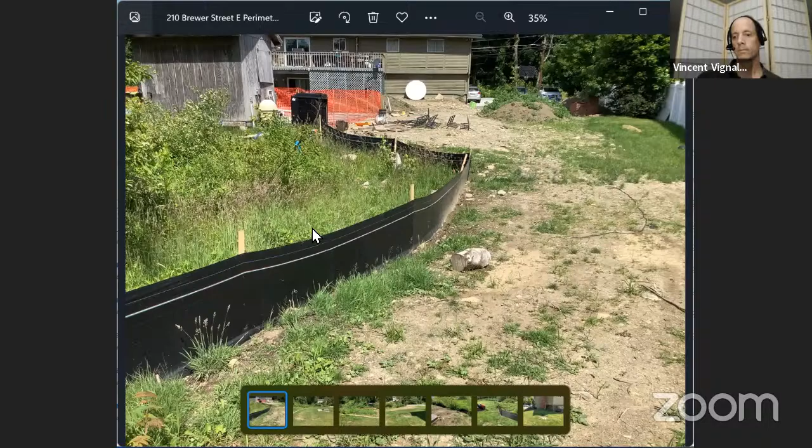Okay, so that's area number 2A. So could you pull the plan up again and move through this, because the other ones are pretty easy?

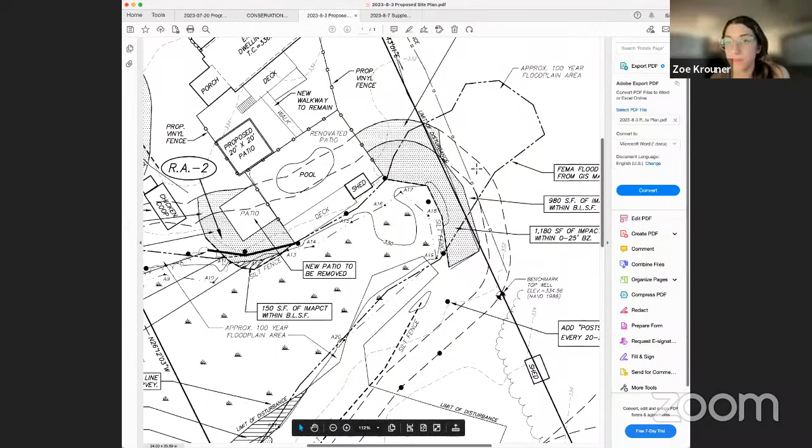No? We're going down southwest of this. You have shown the hatched area where there's fill within the wetland, and that's just going to be taken out, you said, with an excavator, down near that wetland area. Yeah, all the brush—everything back here is some sort of plant material, either grass clippings or lots of brush and sticks. They're moved around, that's it. There wasn't earth movement here.

But yes, all these piles are going to come out, and we're going to use a mini excavator to do that. And again, the reason why we have Goddard there is just to make sure that mini is careful as they do that stuff. If you do it carefully, you can really minimize a lot of damage. And so that's the purpose of this. We wanted to make sure that we're involved with any of this just because it is delicate.

Yep, so that area sounds good. And just to make note, the whole area within that 35-foot zone was altered from the property line all the way up to beyond where the screen is, where that little arrow is.

What's that arrow? I can't read what that arrow notes at the very top of the screen. Sorry, I'm not sure which one you're looking at. It's outside the property lines. It's showing an arrow. Oh, this one, no, up to your right. Up to my right.

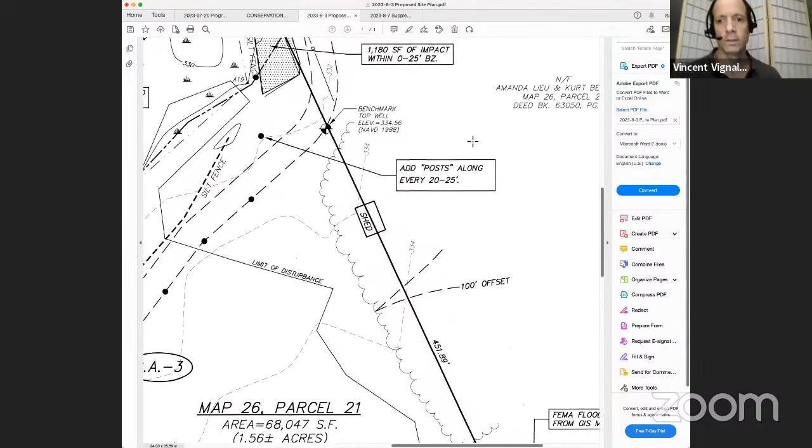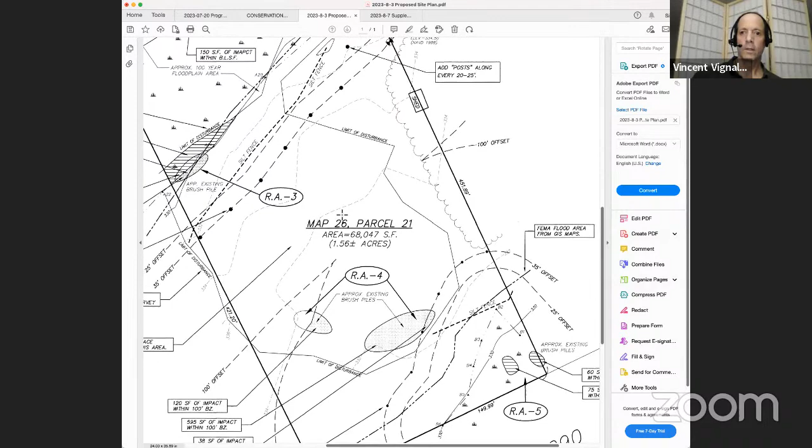Yeah, that one that's just outside by the shed. What does that say? Oh, the posts along—so that's adding posts. Right, and so the area that was altered was basically all the way around that wetland, correct?

There was all brush cleared and no grading. I agree with that. There was no fill, but everything from the wetlands all the way up to the top of the hill had been denuded. Correct, yes, and that was stated in the original NOI submittal. So that's the area we're letting grow back, just so the commission's aware.

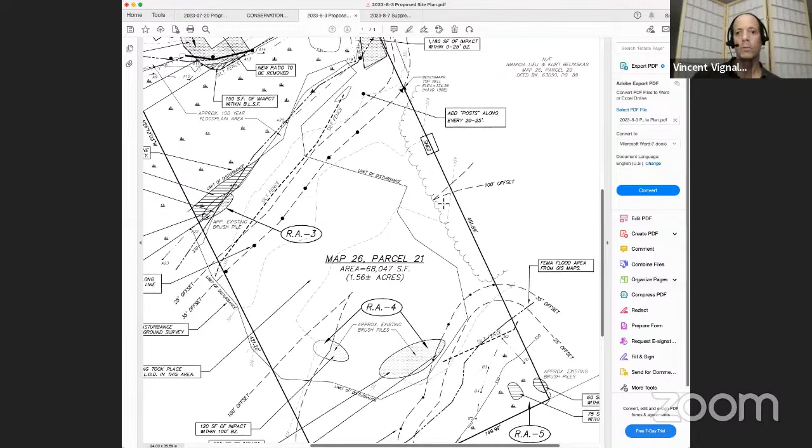So we're just going to let that grow back. We're going to go in and pull out the materials from that area on the left side, the piles along the bottom. Those two piles up in the upland area, I'm not real worried about. That's outside the 35-foot zone mostly, and those are fine—what they're proposing is to remove those and take them off the site.

The other issue I had some concerns with is the alteration at the back, the southeast corner. It's got two little piles shown, but when I was out there, it looked like the whole area was dumped with loam—I mean lawn clippings and brush from clearing a lawn. So I was expecting some excavation work to be done there, not just picking branches off the surface. I didn't see anything in the application, so that was what I was looking for.

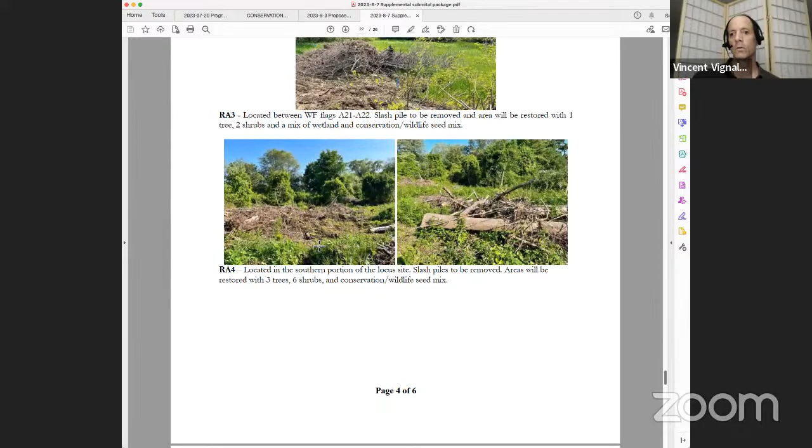Yeah, right in there, RA5, yep. So there we have a similar plan for all the other spots, to remove the slash piles we can see in these pictures and the yard waste, then restore with shrubs and seed mix.

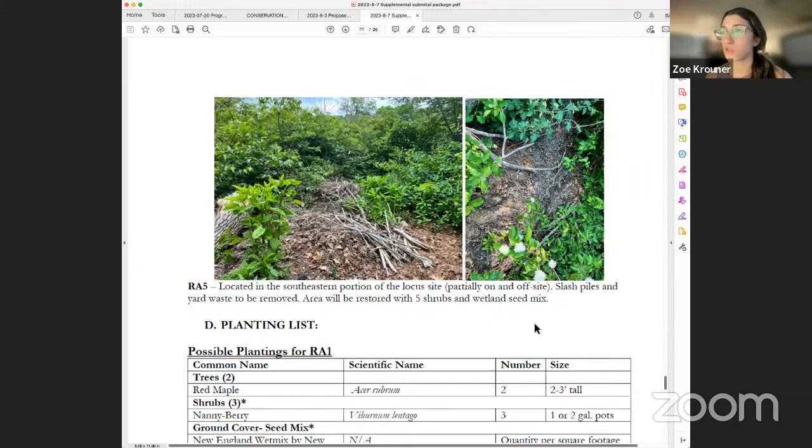Right, but isn't that like two feet worth of lawn and grass clippings and other stuff? When I stepped on it, it sank down quite a bit. That's why I was expecting we're going to remove everything, not just the branches and twigs on top—we're going to pull out whatever is there down to the old original ground that wasn't filled.

That wasn't clear in the proposal. Our intention is to remove anything that was dumped, because anything dumped is clearly impacting vegetational growth, and we can't get anything to grow unless we have soil. So our intention is to remove all the dumping there, because it wouldn't be full restoration unless we had actual soil.

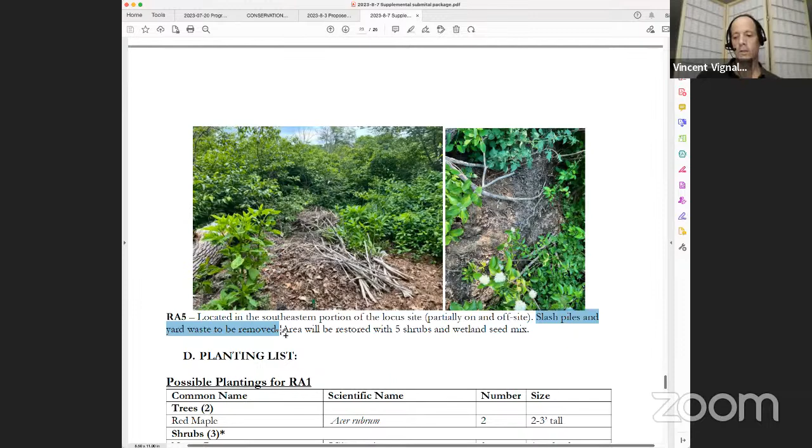Our plan is to remove slash piles and yard waste. Yard waste is leaves, lawn clippings—anything impacting vegetational growth should be removed from that area. Okay, well, we agree, that sounds good. And that's what I was hoping we'd have on the plan. But if you look at the plan, I don't see what the notes said about that.

So to the chair, the purpose of this project has two line items. We have the site plan, which gives you the general locus of everything, and then we have the restoration plan, which provides a lot of the detail, a lot of the language, a lot of the wording. That's typical for a project—you have a site plan, then a restoration plan, a wetland replication plan.

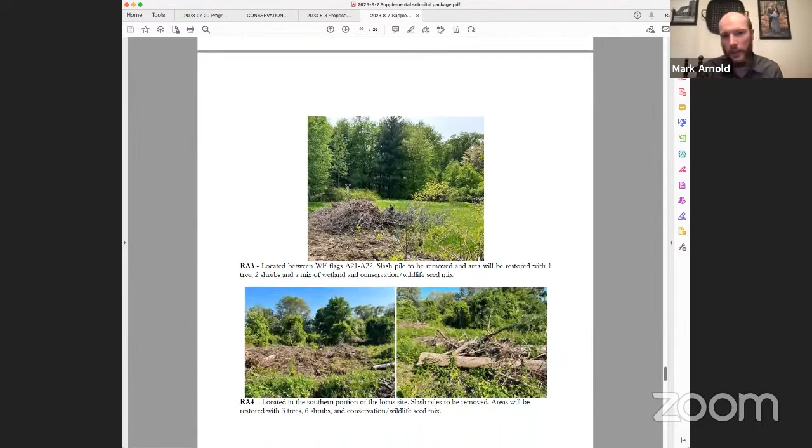We've done this before in Northborough, where we have a site plan provided by civil, and then a replication plan or restoration plan as additional documentation. Usually those are cited in parallel within the order of conditions, and that makes it easier for people to follow. It gives a nice checklist versus burying the site plan with lots of language. That's why we have those two things—we expect both documents to be cited in your order of conditions and complied with.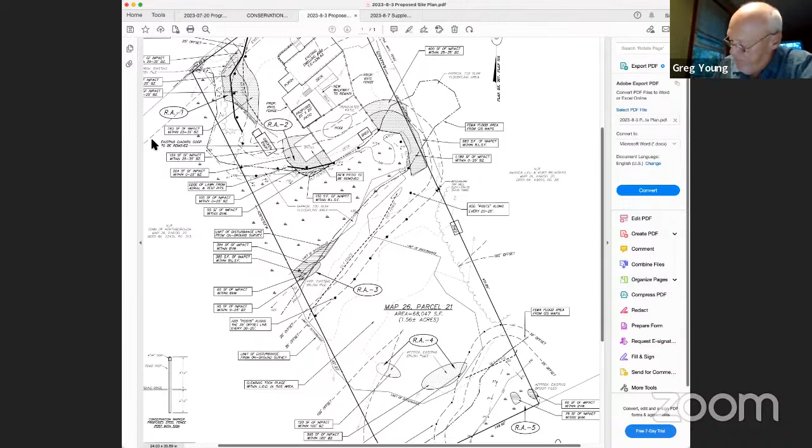Other questions from the commission or comments? Well, everybody speak at once. Right, everybody's happy, it's good.

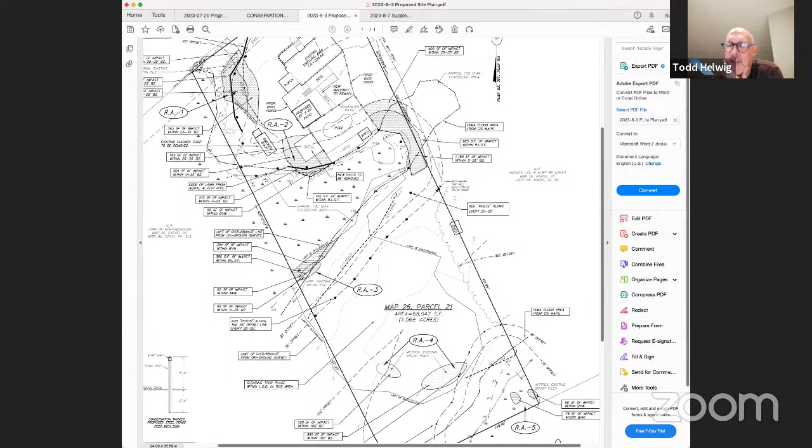I think for myself, I'm done with what they've proposed. I think there's been enough done, enough time has passed, enough pain has been exacted that it's probably good enough at this point.

Okay, thank you, Todd. Anybody else? I have a question, Greg.

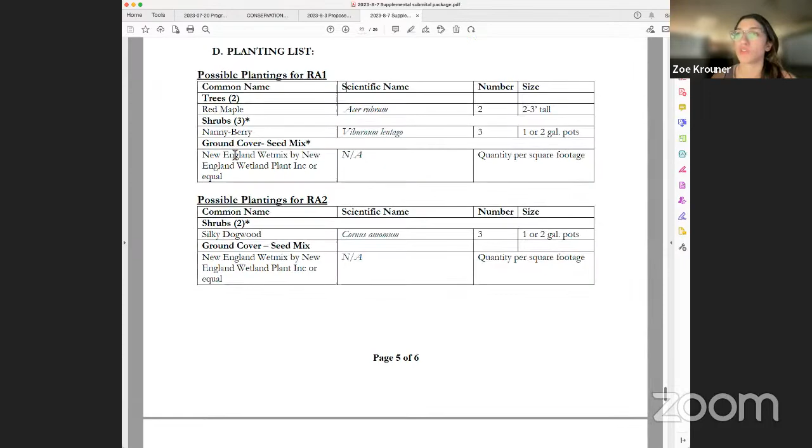Is there a list on the plan somewhere of what plantings they're going to use and what type of seeding? I didn't see that part. Yep, I actually have it pulled up right now for you. We have it listed by restoration area, which matches up on the site plan. So each area has suggested trees, shrubs, and a seed mix on the restoration plan.

Does that satisfy your question, Diane? Yes, thank you. Good, thank you.

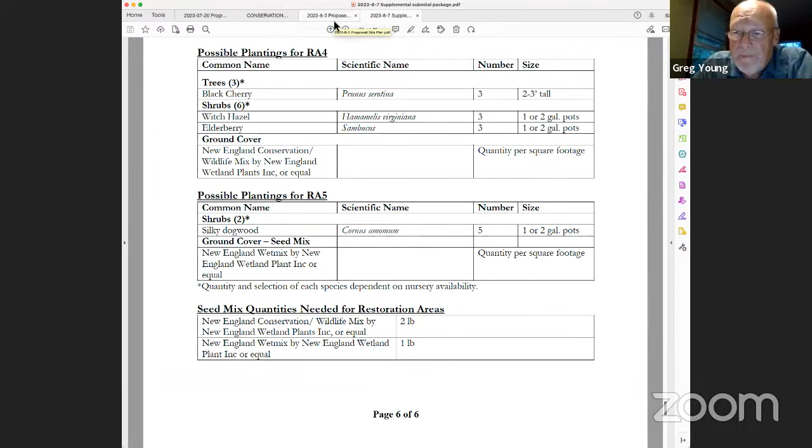Good, good. Anybody else? Dan or Justin, comments? No, for me, I feel like this has gone light years from where we were at the last meeting, and we've made a lot of really good headway here. I think there's a couple little things.

With the signs, I think some type of field location makes a lot more sense, rather than tree lines as depicted on existing conditions plans. Once you actually get out there and walk it, you can work together with Vinny on locating those signs, and I feel like you'll all reach a mutual agreement.

To me, it feels like there's a lot of signs shown here, and I certainly feel like we don't need that many. Once you get out there and walk it, there'll be a pretty clear area where you decide to put those.

So to me, that seems fine. I'm okay with the restoration areas. I feel like it's going to be a huge improvement over what we have out there. And now you've got an owner who really understands the commission and what they have on the site for wetlands going forward. I feel like we're in a much better spot, so for me, I'm at a good spot with this thing right now too.

Okay, good. Thanks, Justin. Dan, comments? I'm comfortable with what they presented.

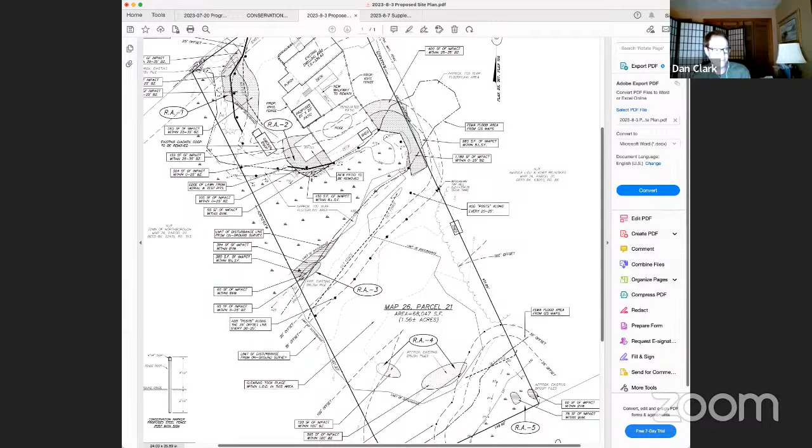And I generally agree with everybody, it seems like maybe there's a few too many signs. Could probably get away with fewer of them. Oh, good, good. Thanks, thank you, Dan.

Vinny, what do you think? The commission seems in general in pretty good shape. And I agree, we've done a lot of good things. I'm glad to see that the patio is going to be moved. That was the big issue. And hopefully we'll get the name of the guy who did the work on the grading and all that other activity. I'd like to make that a condition of the approval.

Because I've asked for that multiple times and not gotten it from the owner, just so that we can contact that person and let them know not to come to town and do the same thing again. Sure, that's reasonable.

Okay, so we're looking here then, any open items, Vinnie, from your side? We have the sign location, which I think everybody's okay with. In some cases 25 feet, other cases something different based on the contour of the land and what it looks like in the field.

I believe we should use the standard size signs, but if there's a reason to do something different, fine. But I think we should go standard sizes. We're going to use less of them. We'll just be more standard.

I think all the questions you had earlier about whether they're just going to take the twigs away or actually dig down and pull some of the stuff out too - I think that's covered.

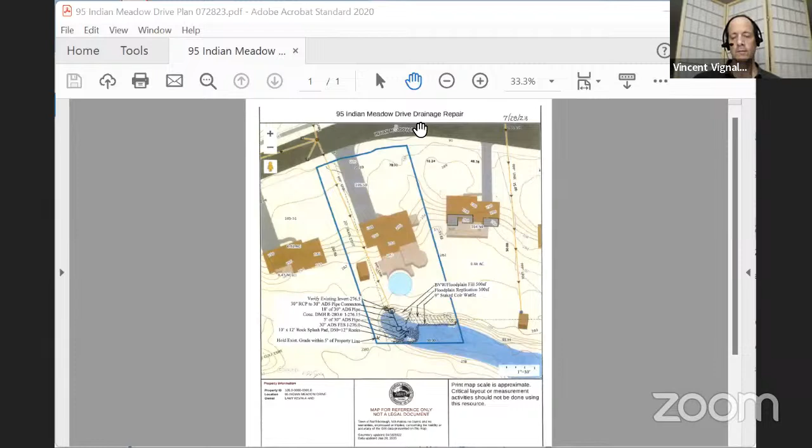So I'm sharing my screen here with the plan for 95 Indian Meadow. The situation is the subdivision was constructed, and there's drainage in the street directed down an easement along Mr. Lamy's property, shown in blue. It comes down next to a shed and discharges to a wetland area in the back along the golf course, behind these properties. This drainage takes a pond farther up to the north of this property, on the opposite side of the street, behind what I can't recall the name of.

Kevin, what's the name of that street across the way from you? I believe that's... not Abenaki. Geez, I should know it. I don't know it myself.

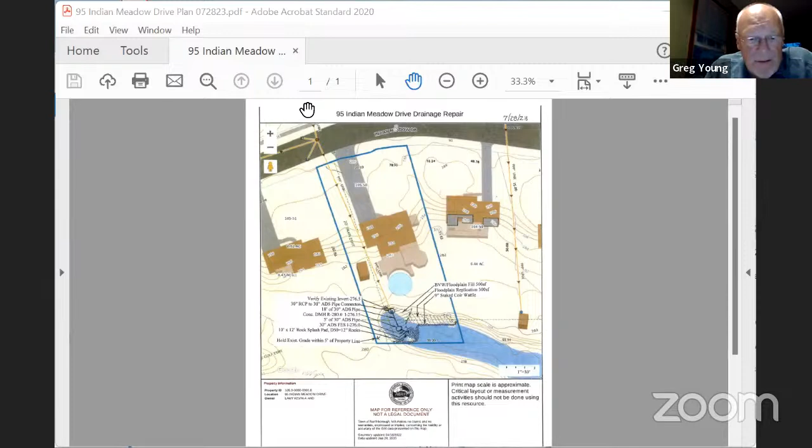Well, it's a stretch of probably a few hundred feet of street drainage and backyards that flow to a detention pond across the street and then through this 30-inch pipe. It also picks up drainage from the west section of Indian Meadow Drive and discharges down here. The eastern section of Indian Meadow Drive comes to this pipe, which discharges in the back area here. So it's mostly the area north and west of 95 Indian Meadow that was on the approved subdivision plan that comes in here.

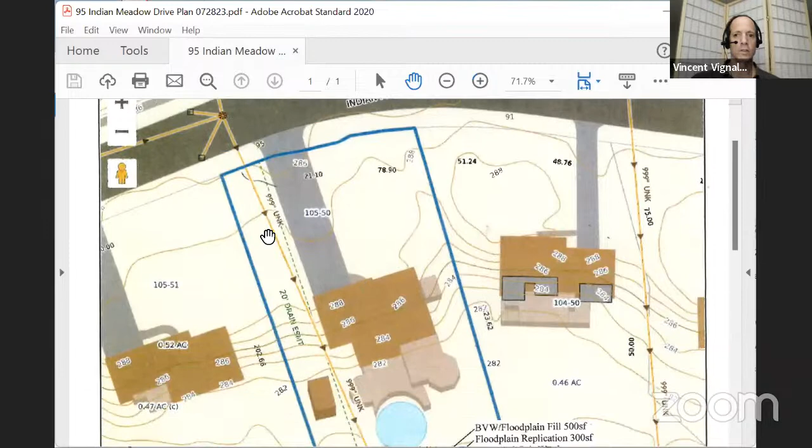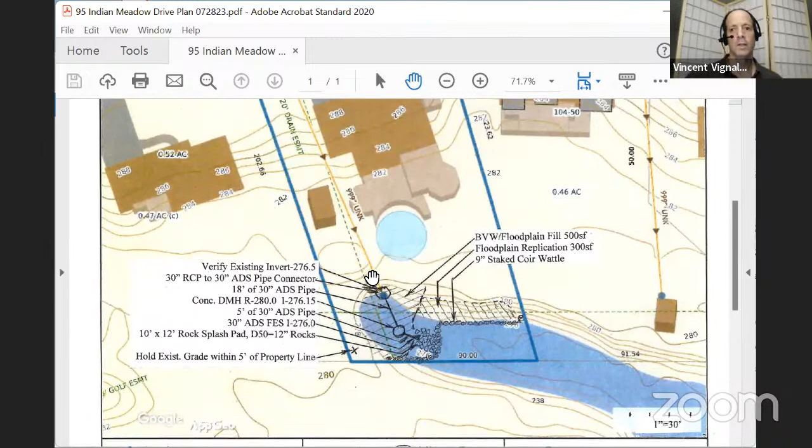So that's where the drainage situation is. A little more detail: the pipe was constructed by the town and put in place, but it wandered off the drainage easement and is now outside that area, while the drainage easement is over here. So the town has been trying to work on this for the last 15 years, I think.

And the commission, back in 2006, issued an order of conditions for this work to be done, to extend the pipe since we're taking some of his usable yard area here. He's asked, and is willing to grant an extended easement, if he can have a little bit more usable space in the back by filling that wetland a little bit.

Within the work area, there's an existing flared end section that'll be removed. Then they'll install a connection between the reinforced concrete pipe and a plastic pipe, 30-inch diameter, extending about 18 feet to a concrete manhole, then directing it out 5 feet to a flared end section into a riprap area so we don't scour out the wetland. So we're really extending it about 20 feet off in the back here, with a stabilized area to handle the flow from that 30-inch pipe.

The hatched areas going one way show the wetland and floodplain that's going to be filled, and the hatching going the other way shows the floodplain and some wetland at the bottom that will be excavated. He's willing to pull this back a little bit so we get some compensatory area for a portion of what's filled, though it's not a very usable area, and he'll be putting stone along that slope.

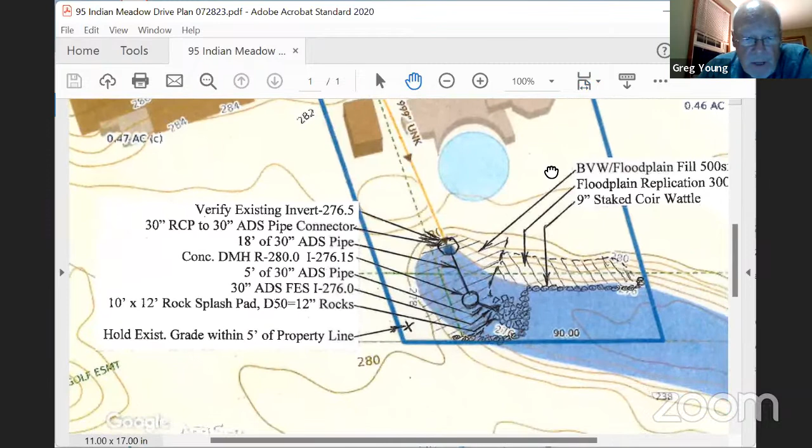Maybe just one quick question for Vinny. Vinny, this is BVW, right? But it looks like there's a lot of man-made channels on the golf course and things like that too. This area is clearly disturbed, and over time I'm sure this developed because of the flow from the 30-inch pipe from the roadway, probably allowing a lot of that vegetation to grow. So we're not talking about a bigger BVW that's all pristine — it seems like it's really between the yards and the golf course, maintained with some man-made channels through here too, huh?

That is correct. It's a vegetated channel. There's no flowing stream condition that would make it a bank or a stream, but it is a vegetated wetland, mostly buckthorn and other plants. Diane, you were out there and we looked at a few of the plants — there are cattails at the base, so it's performing a function for stormwater quality improvement, which is good.

We're going to try to save that material when we dig it out, and plant it in the area along the bottom of the slope that's going to be excavated, to provide some stabilization and water quality improvements. It also has indications of a lot of sand and stone from the street drainage that's come down here, so it's been filled a bit, meaning the work putting in the riprap at the end should be easy. He should be able to place 12-inch diameter average-size stones and just knuckle those in to make a stable discharge point.

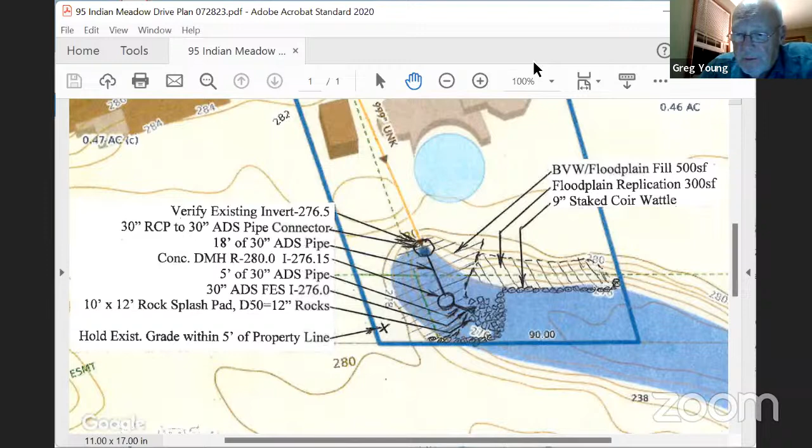Okay, Mr. Lamy, anything you want to bring up before we move it forward? No, that is it. If there are no other hands up, we need a motion to close the hearing. So moved.

Second, seconded by Todd. Roll call. Dan Clark, yes. Justin Dufresne, you're muted. All right, Justin, yes. Diane Goldner, yes. Todd Helwig.

Yes, I vote yes. Now we're looking for a motion to issue an order of conditions for 95 Indian Meadow Drive. Anything special here, Vinny?

I don't think so. I think we want to put in 2 or maybe 3 signs at the top of the slope once it's done, so that we have a marking that this is it. Okay, that seems fair. Just no more than 2, right? No more than 2 is good. Okay, so moved with the 2 signs.

Is there a need to second? Second, seconded by Dan. Roll call. Dan Clark, yes. Justin Dufresne, yes. Diane Goldner, yes. Todd Helwig, yes.

I vote yes. Mr. Lamy, you're all set. Thank you, have a good night. Do you have any target dates to get this done or to start?

No, I don't. I'd like to have it done within 3 months. Yeah, just want to pick that period of weather, right, nice place and go do it. Yes, sure. Good. Okay, well, thanks for being patient for 20 years and your cooperation.